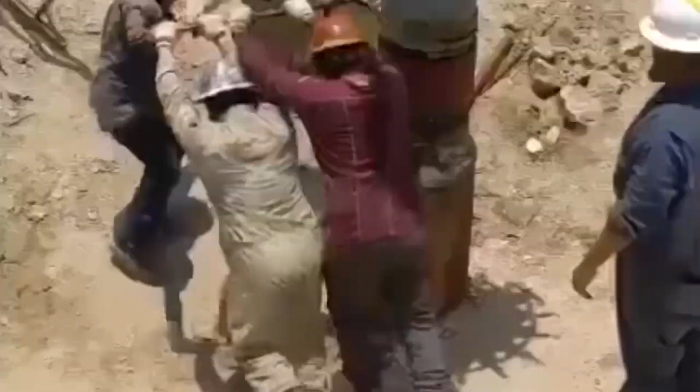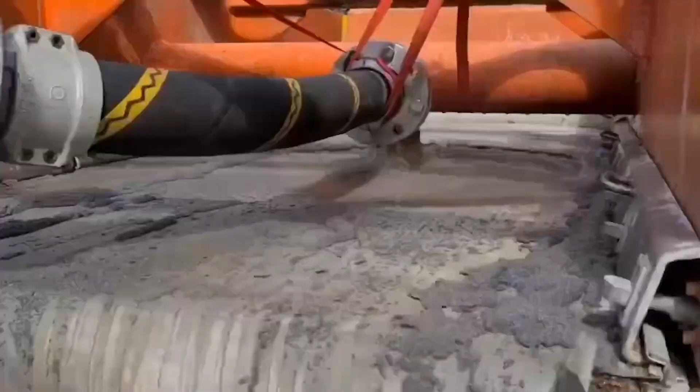Right, so we're back with the last session of the day with the 2023 PIVOT Jordan Nielson Disruptive R&D competition. I guess not everybody knows who or why we have named the competition after Jordan Nielson. Jordan worked in a Southwest Research Institute.

He was very much appreciated in the geothermal community because he was a pioneer in the next generation of heat-to-power technologies with the use of supercritical CO2 to transform heat into electricity with higher efficiency than with the Rankine cycles that we're using now in a very matured way. Unfortunately, he passed away last year.

This year. And when we learned about his passing, we immediately decided to name this competition after him because he really represented the kind of role model, the kind of scientist that we would like to fund inside of InnerSpace, because of his disruption, because also the way that he collaborated with others, and because of the way that he had a view of transforming the geothermal industry. In order to remember and honor him, there is a small video that we wanted to play for you.

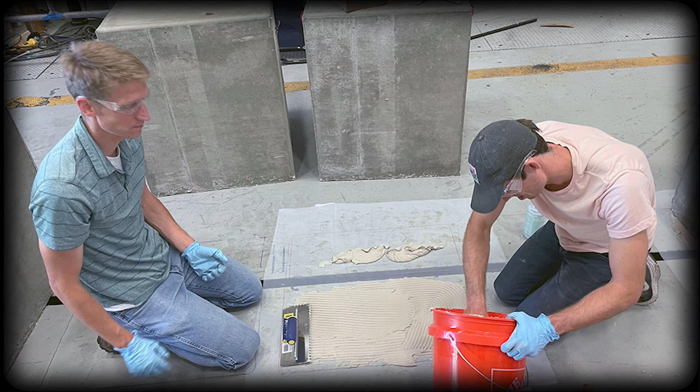I'm Alicia Nielson, and I was married to Jordan for just shy of 10 years, up until he passed away. And his biggest passion in his life was his career, and especially in the geothermal field. That was something that he was just very passionate about. Jordan did take an approach of acknowledging when things were better than before, and he was really great at recognizing progress.

A story that was shared during his funeral from his boss was that he often didn't recognize failure, and he understood failure to be really just one step closer to a solution. And I think that mindset is what allowed him to push those boundaries and think outside the box. When I think about his goal in the geothermal field, he talked about always wanting to leave the world a better place for his kids and his future generations.

Well, Jordan will certainly be missed in the geothermal community. Thanks a lot, Alicia, for the help to produce this video. And we hope that this message and this contest inspire others to follow the path that Jordan created. We definitely need more Jordan Nielsons in the geothermal community to make, as Alicia pointed out, a better world for our future generations.

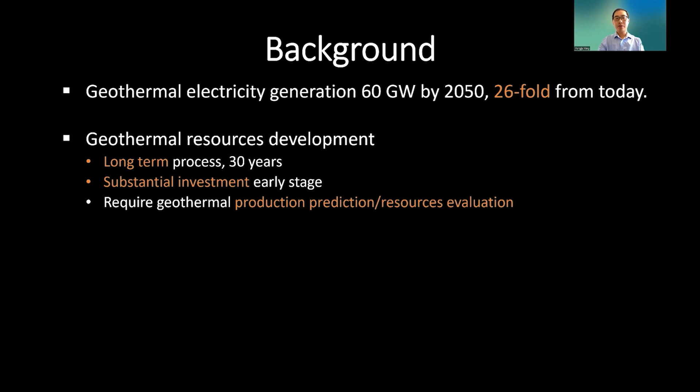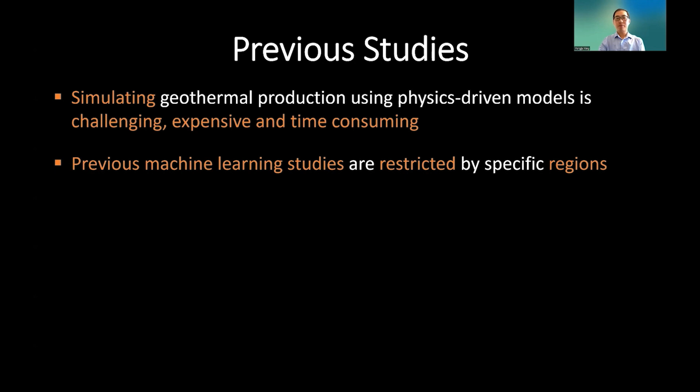The previous studies include either the physics-driven model or machine learning models. However, simulating geothermal production using physics-driven model is challenging, expensive, and time-consuming. The previous machine learning studies are restricted by specific regions because they rely on the historic data in a specific geothermal reservoir. So this proposed work aims to predict geothermal production using physics-informed machine learning model. It is not restricted to any specific region by incorporating fracture networks. It also avoids difficulties associated with physics-driven models by utilizing machine learning methods.

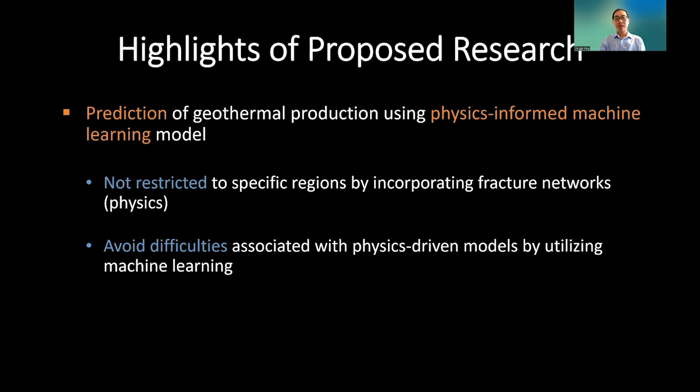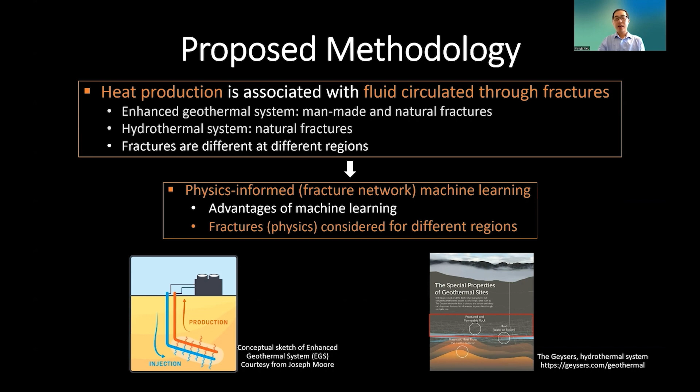Now let me explain how this physics-informed machine learning model works. So heat production is associated with fluid circulating through the fractures, no matter in enhanced geothermal systems, which rely on man-made and natural fractures, as shown on the left, and also the hydrothermal system, which relies on the natural fractures, shown on the right figure, which is the Geysers. Fracture characteristics and spatial distribution are different at different regions. So this brings us to the physics-informed machine learning model. It has the advantage of machine learning methods, and it also considers fractures as inputs, as physics, which will overcome the machine learning model restriction by regions.

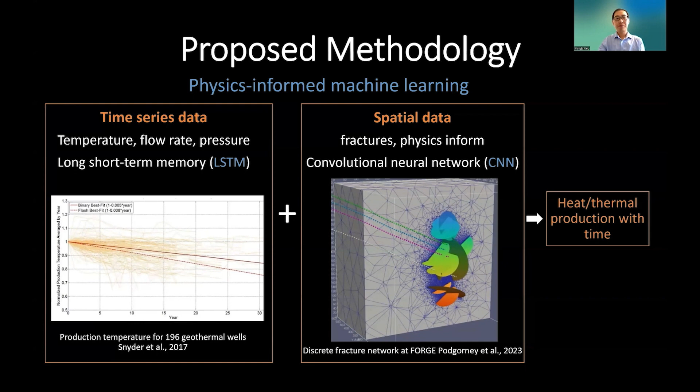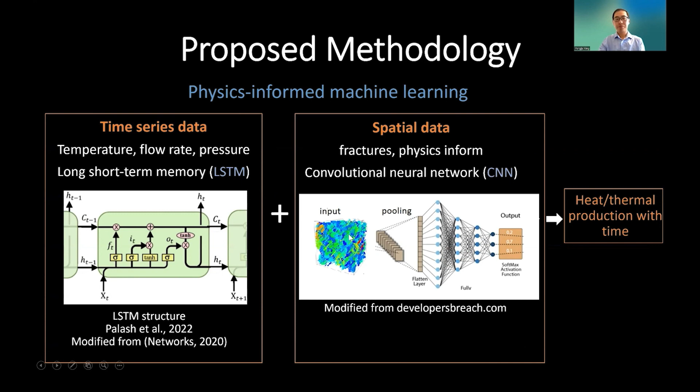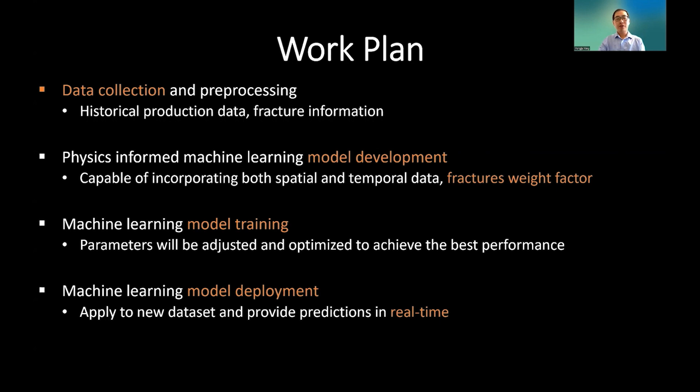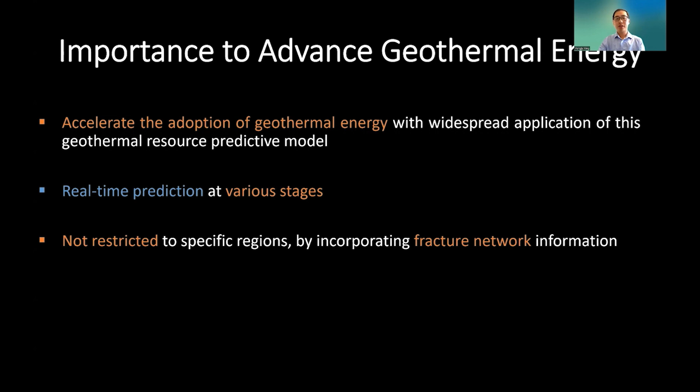So the work plan is data collection and pre-processing, then model development and model training, and finally model deployment in real time. This proposed work can accelerate the adoption of geothermal energy with widespread application of this geothermal resources prediction model, because it can do real-time prediction at various stages and is not restricted to any specific regions, by incorporating fracture network information.

Hi, my name is Rita Esuru Okoroafor, and today I want to share with you a technology that has the potential to disrupt geothermal energy systems. This technology is inflow control devices, and in the next few minutes, I'm going to explain how it works and how my research group and I plan to use it to revolutionize enhanced geothermal systems.

I want you to take a look at this figure here. This is something that tries to represent an enhanced geothermal system. In this case, we have an injection well, a producer well, and we are injecting cold working fluid, which comes in contact with hot rocks, extracts heat from these hot rocks, and is then transferred to the producer. We produce hot fluid through the production well.

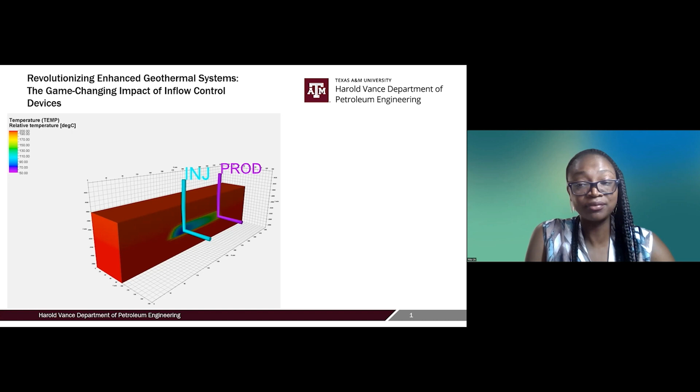Quite recently, Fervo Energy was able to demonstrate that we could use multi-stage, multi-cluster reservoir stimulation to enhance the thermal performance of enhanced geothermal systems. That was groundbreaking, but we need to ask ourselves, can we do more? Can we do more to push the boundaries of what was given to us by the enhanced geothermal shot? And so this is where this disruptive technology comes into play.

I want to first of all talk about the challenge. In this figure, I am showing just one out of many fractures through which the wells would have traversed. As we are injecting the cold working fluid, we are actually cooling down the rock. And in some cases, we may end up cooling down the rock beyond which it becomes economical to produce. In other cases, there could be heterogeneities within the subsurface that prevent us from having uniform flow through the fractures.

And then quite recently, Dr. McClure was even able to demonstrate that thermoelastic fracture opening and propagation occurs, and they actually have a negative impact on the uniformity of flow through these kinds of fractures. So in essence, we could have uncontrolled thermal breakthrough in our systems. And this is not something we want. We need to have some kind of control.

So what do we propose? We are proposing a way in which we could make flow uniform. In the oil and gas industry, this technology has been there for a while, where we use inflow control devices to restrict flow by creating additional pressure drop where it's needed. And along horizontal wells, we create even flow.

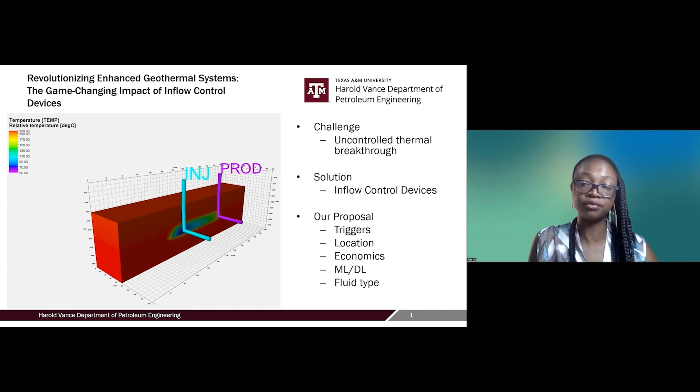So what does my team want to do? We want to look at potential triggers we could use to make the inflow control devices come into play, such as should we use certain temperatures? When the reservoir gets to a certain temperature, it should stop flow in that fracture and open another ICD. Other things are pressure or flow rate. So we want to investigate the best triggers to do that, or even the time.

We also want to look at the optimal locations for these ICDs. Will they be in the injector well, in the producer well, or a combination?

We also want to look at the economics of putting ICDs in such multi-stage, multi-cluster, hydraulically stimulated wells. And then, of course, with numerous simulations that will take place, we want to use machine learning and deep learning to be able to optimize the systems.

But more importantly, in honor of Jordan Nelson, who has looked into CO2 for geothermal systems, we would want to evaluate if CO2 would be a potential working fluid.

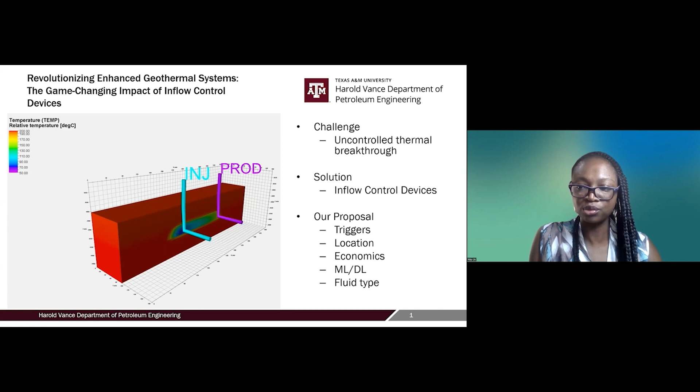So I want to thank you for listening to this technology. We believe that it has the possibility of making controlled uniform flow through our systems and ensuring optimal thermal breakthrough. Thank you very much.

Hello, I'm Malcolm Ross, known to some people as the Geothermal Evangelist. I'm a university professional at the Bureau of Economic Geology at the University of Texas, known as the BEG. I represent a team of researchers at the BEG focused on geothermal energy, and I'd like to discuss today a project we call Spindle Hot.

Why Spindle Hot, you say? Well, the first well in Texas that started the Texas oil boom was called Spindletop, located near the Spindletop Salt Dome near Beaumont, Texas. I mentioned the salt dome because our proposal is to look at the geothermal potential of salt domes. Wouldn't it be sweet if a renaissance of renewable energy kicked off at the place where the Texas oil boom kicked off? Salt is everyone's favorite flavor enhancer, but are you aware that salt is really just another rock?

For example, did you know that over geologic timescales, salt is mobile and it behaves similar to toothpaste, being squeezed upwards into myriads of shapes by heavy overlying sediments. This creates diapir stocks and pillows.

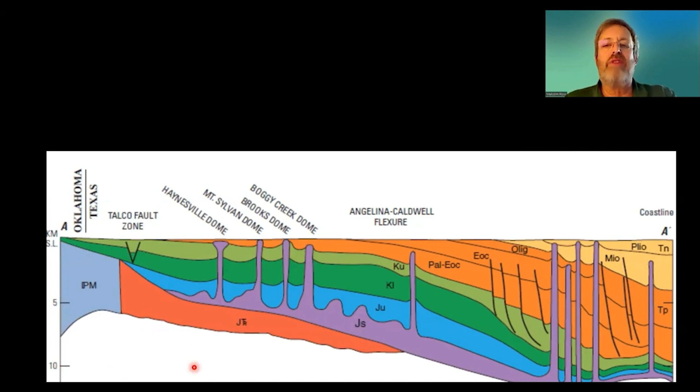And that raises the first key question we seek to answer. If these diapirs are deeply rooted in hot rock layers, does that high thermal conductivity make it so diapirs act as heat pipes, bringing the heat to the surface where we can easily get at it?

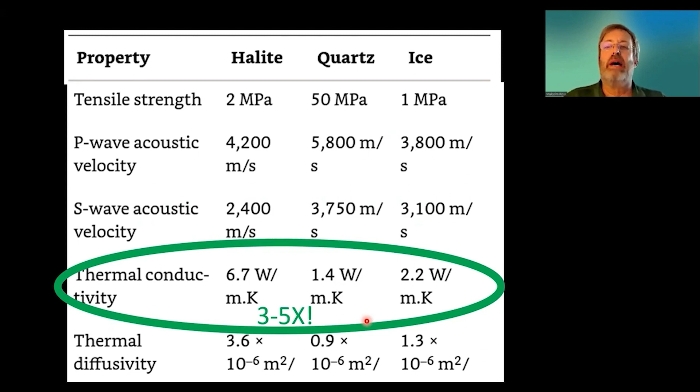We might be asking, if these natural heat pipes exist, why weren't they exploited in the past? This leads us to the next interesting property of salt: salt diapirs have no porosity or permeability. That makes it an unattractive target for oil and gas or traditional geothermal.

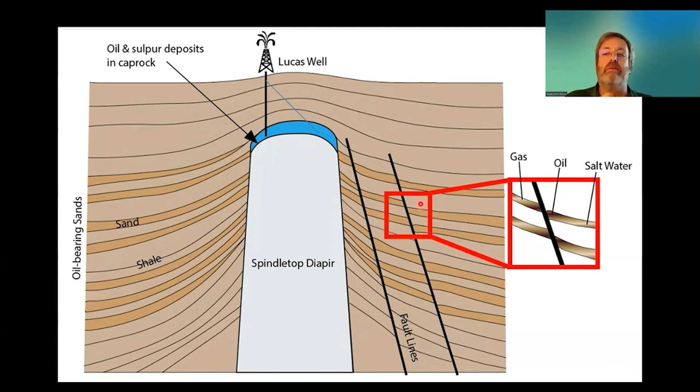Our proposal is to drill into the main body of the salt diapir, accessing the heat piped from below. But wait, you're asking, you just said that the salt has no permeability, so it is not a target for geothermal. Exactly, traditional geothermal. But what if we were to make it a closed loop? That way, we would access the heat only by conduction and thus wouldn't need permeability. In other words, until the recent advent of closed-loop geothermal, this approach would not have been possible.

When it comes to drilling, salt offers one more exciting property: it is far easier, cheaper, and faster to drill than regular rock. Heck, we can even drill it with water jets.

This idea won't be easy. Many of the salt properties that we take advantage of here also cut both ways.

The biggest challenge is the ability of salt to flow. It flows at rates observable at human timeframes. That makes it possible that when we drill a hole, we may struggle to keep it open, and the flowing salt may bend or even shear our closed loops.

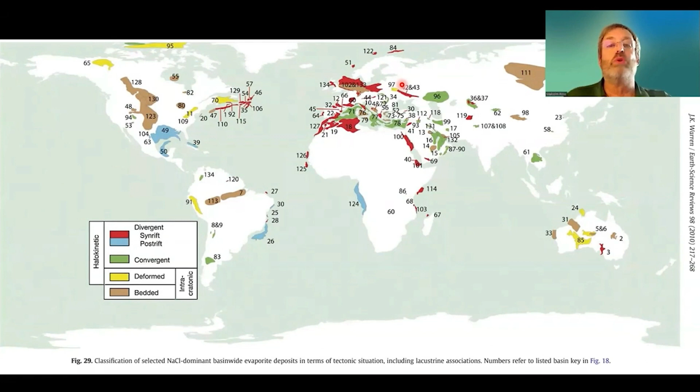Our second challenge is the thermal conductivity. It's great for extracting heat as we're going down and through the horizontal section, but that same heat will be sucked away by the high conductivity of the salt surrounding the return flow pipe, unless we insulate that pipe or we do the return journey through the less conductive surrounding rock.

These two challenges form the core of the first step of our project: to drill a slim hole into a diapir, hopefully the Spindletop diapir, and measure the temperature and heat flow, then introduce tools to measure the long-term changes in pressure on the pipe as we try to keep them open.

There's one more challenge, or maybe it's an advantage, for geothermal projects around salt diapirs. We are not the only ones thinking of using salt domes. Teams worldwide are thinking about using salt structures for storing hydrogen or carbon. But what if we did not compete with them, but rather we complement them by providing 100% clean energy and heat to do what they want to do?

This is where the broader resources of the Bureau of Economic Geology, especially the salt experts at the Applied Geodynamics Laboratory, will become important.

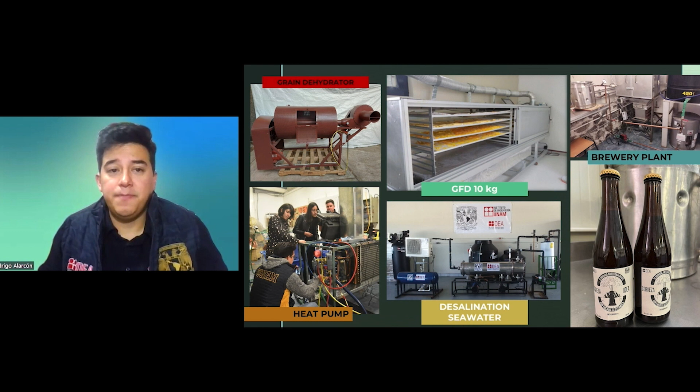All these projects are direct applications of geothermal energy, so their geographical implementation is limited to the availability of this type of resource. This situation represents a disadvantage for the more than 2,000 sites with geothermal manifestation identified in the country due to their isolated condition from the electricity grid.

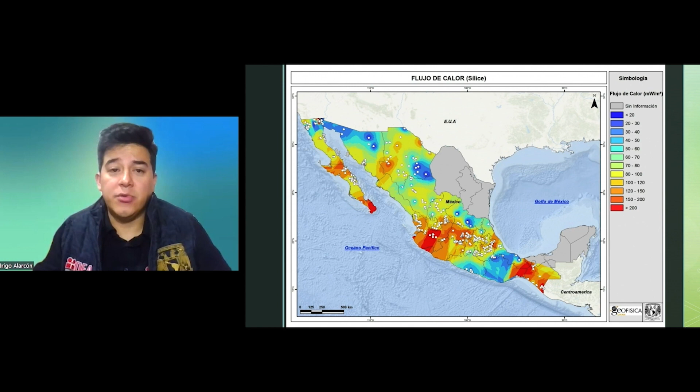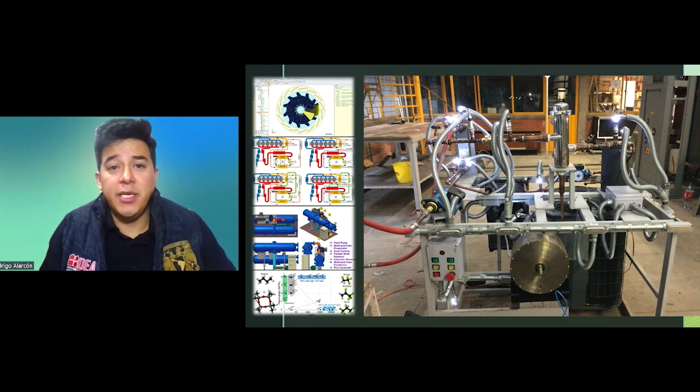Against this background, we have worked on the development of a modular ORC prototype that takes advantage of low and medium enthalpy geothermal energy with the intention of generating electricity on site and helping to promote commercial projects for direct use of geothermal energy.

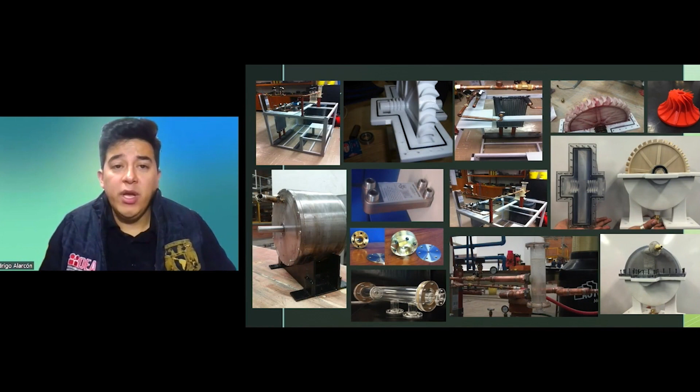We have attempted the design and analysis stages of the turbomachinery required for the prototype, as well as the sizing of the pumping and heat exchange equipment, achieving a first prototype of 10 kilowatts capacity.

The project has been developed to reach a level of technological maturity that allows operation tests to be carried out under relevant conditions.

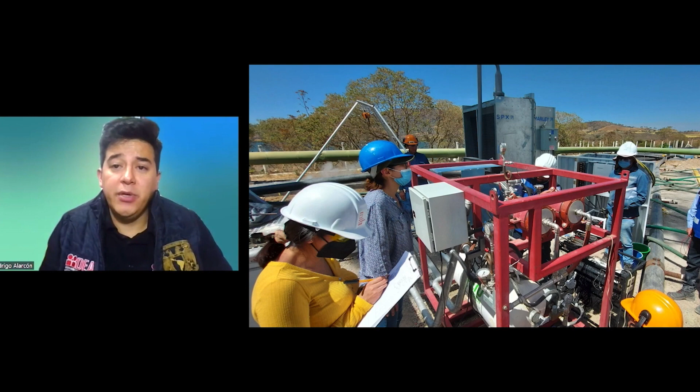Validation tests were carried out last year to evaluate the performance of the prototype using geothermal brine from a geothermal power plant in Mexico.

Based on the development of this operational test, optimization and improvement points have been identified in the design, especially in the power system and electrical conditioning of the unit.

For this reason, the investigation will be oriented to carry out modifications to the current prototype that allow addressing the points susceptible to improvement, such as seals, electrical generation equipment, and instrumentation, in order to ensure a safe and reliable electrical supply. This project was sponsored by a federal fund in Mexico to achieve the current technological level.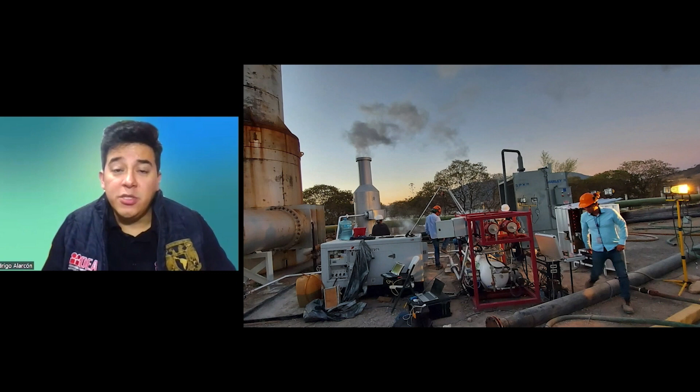Winning this competition will allow us to address the weak point of the current prototype and complete it with a real-time data acquisition and monitoring system, as well as improve the electrical conditioning stage required for the self-supply schemes or supply to the electricity grid.

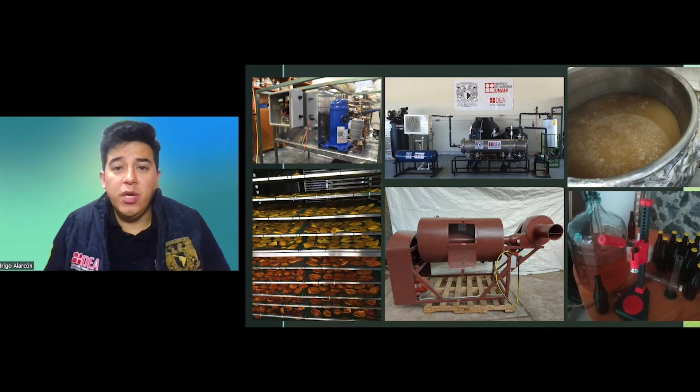This advance in technology will allow us to reduce the cost of the system and thereby promote its use in conjunction with the direct use project that we have already worked on, either in a cascade or parallel configuration, which will eliminate the barrier of electricity supply.

Besides, this project will promote the implementation of more projects for the direct use of geothermal energy, promoting its use in all regions of the country that have geothermal resources, bringing social benefits to communities such as job creation and the specialization of human resources, and mitigation of environmental impact.

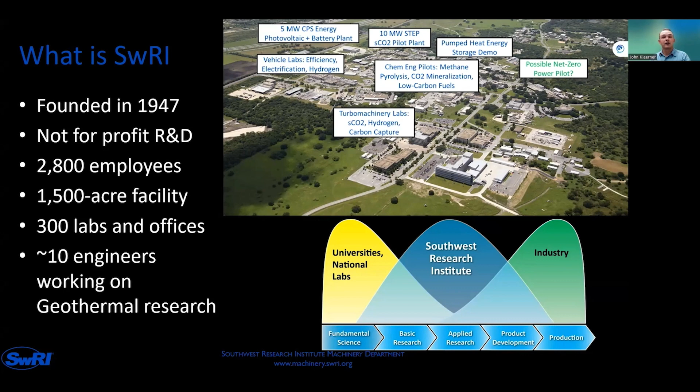Here at Southwest Research Institute, as part of the machinery department, we have done a significant amount of work in the oil and gas industry, including various power cycles, as well as working a lot with supercritical carbon dioxide, or SCO2. It just so happens the geothermal energy industry is a perfect place for all three of those research areas to come hand in hand and allow us to provide a very high level of expertise from past experiences.

At SWRI, we have done a lot of geothermal cycle modeling to start off with, including binary plants and thermosiphons as well as others, showing what SCO2 looks like in those applications. Using our past history with SCO2 as a working fluid, we know the high efficiency and power density attributes it has to offer. We wanted to look at what that looks like in possible geothermal setups and how we can benefit as a nation and a world from using these combinations hand in hand.

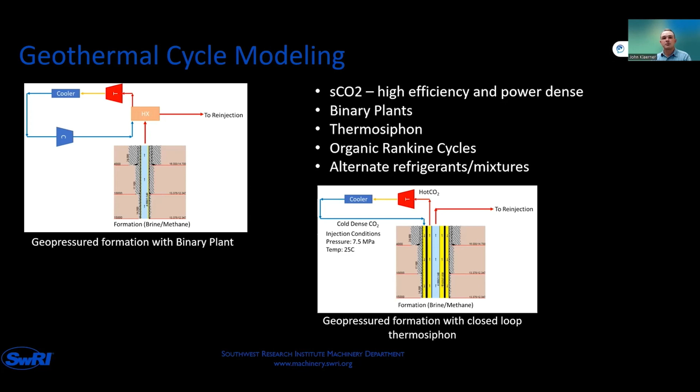In order to test a lot of these models we have come up with over the past number of years, we actually created a natural convection loop, or thermosiphon, in one of our laboratories. This is simply a closed loop system filled with supercritical carbon dioxide that runs through a hot bath and a cold bath with a supercritical temperature and pressure of 88 degrees Fahrenheit and 1070 psi. SCO2 is at a perfect spot to provide great advantages compared to steam or other working fluids, especially in a geothermal application.

Our test here simply proved out our models, and the fact that you can create a thermosiphon or flow loop without the need of any compressor, simply driven off of the density changes of the fluid by the hot bath and the cold bath, simulating what could be a potential turbine with an orifice plate in the system. What we at SWRI would like to use, though, with the potential research funding from this PIVOT competition, is to put several flow visualization components into our natural convection loop.

What that would allow us to do, though, is to test various mixtures of SCO2 in this loop to determine their feasibility and any potential risks or rewards using mixtures instead of pure CO2. These mixtures could include any other fluid at any given ratio, but would allow us to see how they react near the critical point, where SCO2 is already not the stablest fluid in itself.

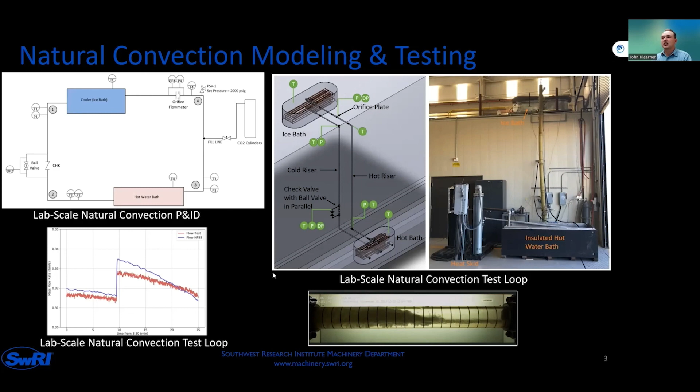Considering the very high density swings that occur of SCO2, which is one of its major advantages, this is something we want to look at and research further with potential mixtures. Using this funding to create and put these sight glasses into the test setup would allow us to determine mixture stability at the new critical point, as well as adjust mixture ratios to tune that critical point as desired. This tuning could then be used in the commercial geothermal realm, depending on season or well condition, to optimize your well performance as well as the performance of the entire system.

The big thing too is that because of the adjustment of the critical temperature, slightly raising it from the current 88 degrees Fahrenheit, allows for lower cooling capital costs depending on where the cycle is being used. With that, we would be able to give out test data as well as validate models of these mixtures to the geothermal industry for use worldwide. And with that, I thank you.